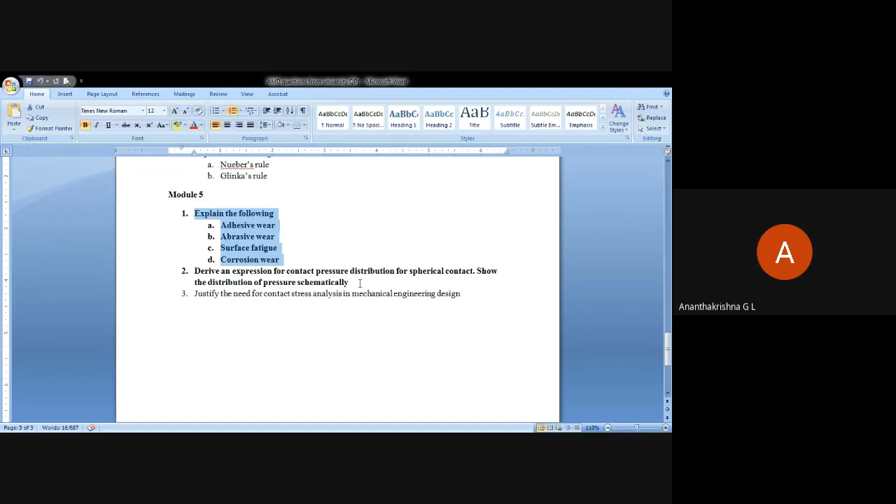Explain the following: adhesive, abrasive wear, corrosion wear, and derive an expression for contact pressure distribution for spherical contact. Show the distribution of pressure schematically. Just note down these two questions.

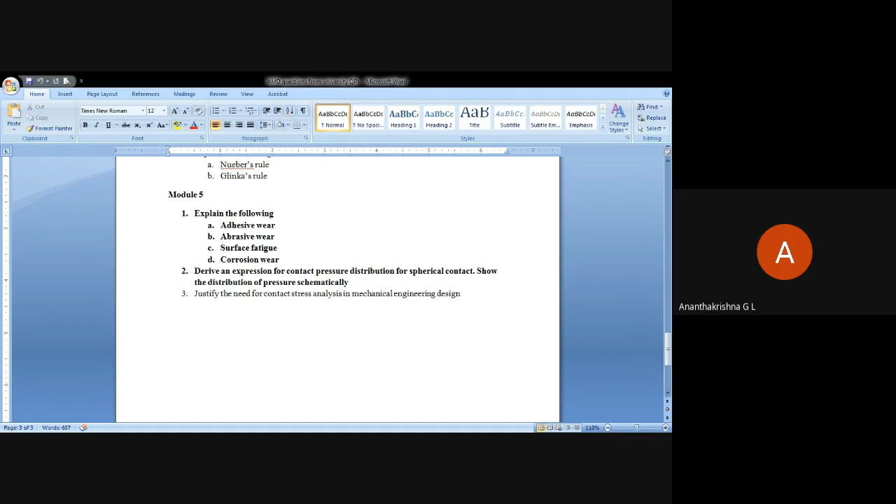Finish noting down? Yes, sir. Yeah. Okay, so

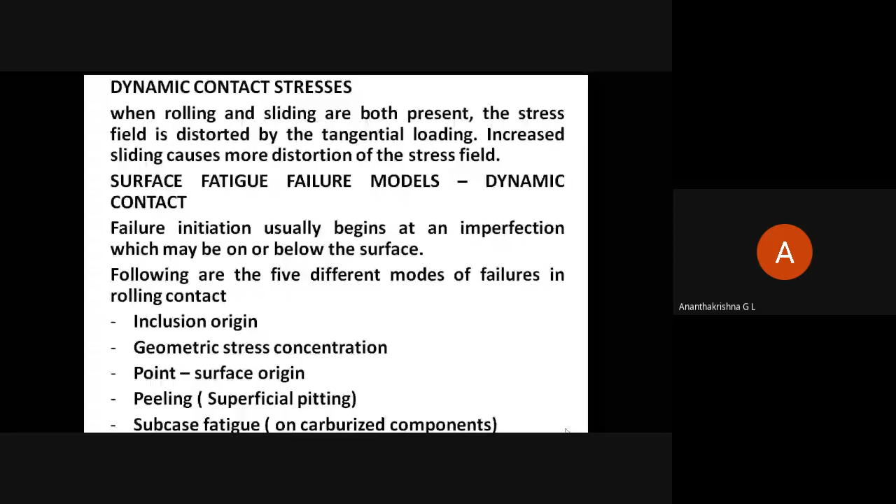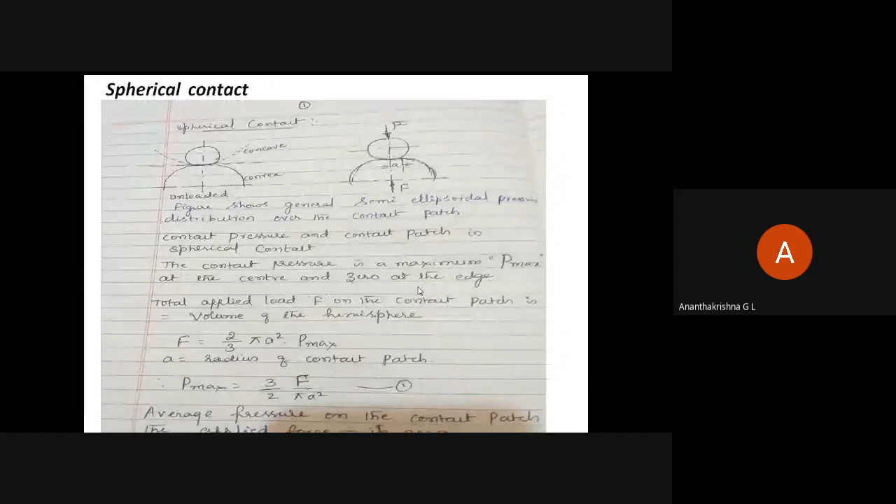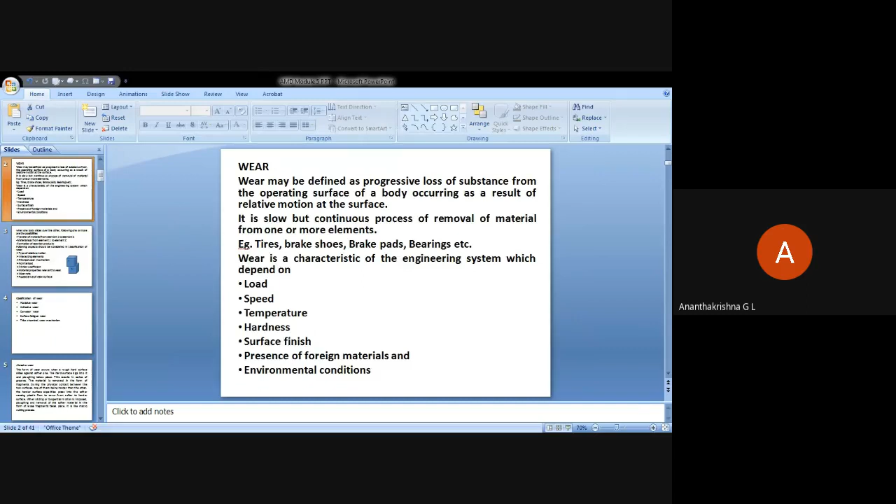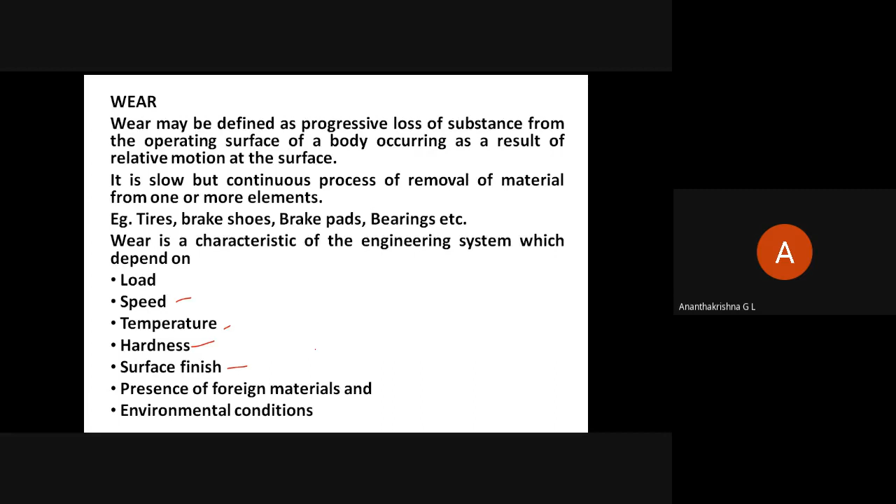Okay, so in module 5, what all we learned, surface failure is the title of the module. In this we learned about wear. It's a progressive loss of substance from the operating surface of a body occurring as a result of relative motion at the surface, and it depends upon load, speed, temperature, hardness, surface finish, presence of foreign materials, and environmental conditions.

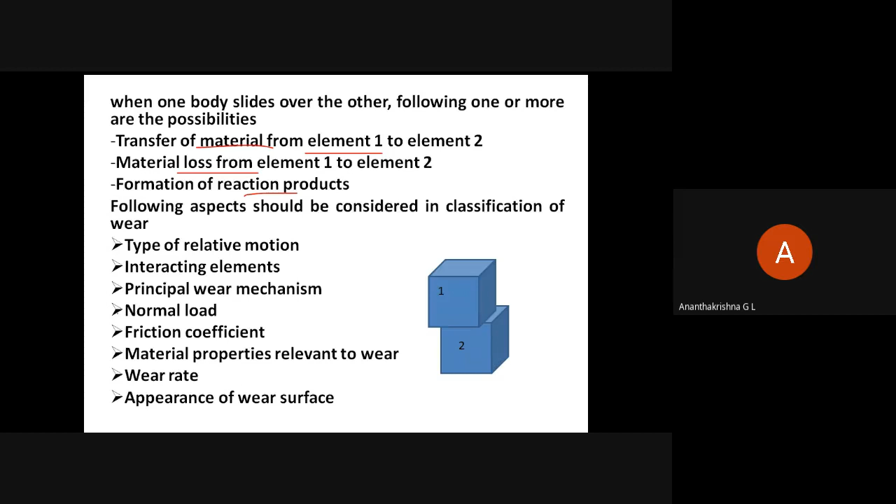And during sliding of one member on the other, the transfer of materials from one element to another is going to take place, from either 1 to 2 or 2 to 1, there's going to be loss of material. And then you will have formation of reaction products. The following aspects are considered in classification of wear: type of relative motion, interacting elements, principal wear mechanism, and so on. In classification of wear, we have abrasive wear, adhesive wear, corrosion wear, surface fatigue wear, and finally tribochemical wear mechanism.

So in abrasive wear, we saw when a rough hard surface slides against a softer one, essentially a grinding machine operation, where the grinding wheel is the hard surface, and the material being removed is the softer one, there you are going to have abrasive wear. In abrasive wear, we have two categories. In category 1, we have 2-body operation and 3-body operation. In category 2, we have gouging, grinding, and erosion abrasion.

2-body operation is like finishing of metal by files, which we have done in our basic workshop laboratories. And 3-body operation is where the particles are reduced in size, as in an ore crushing plant. So that is category 1. Then gouging operation is caused by impact and results in macro deformation of the surface. Example, shovel, hammer in impact pulverizers. So that is gouging operation.

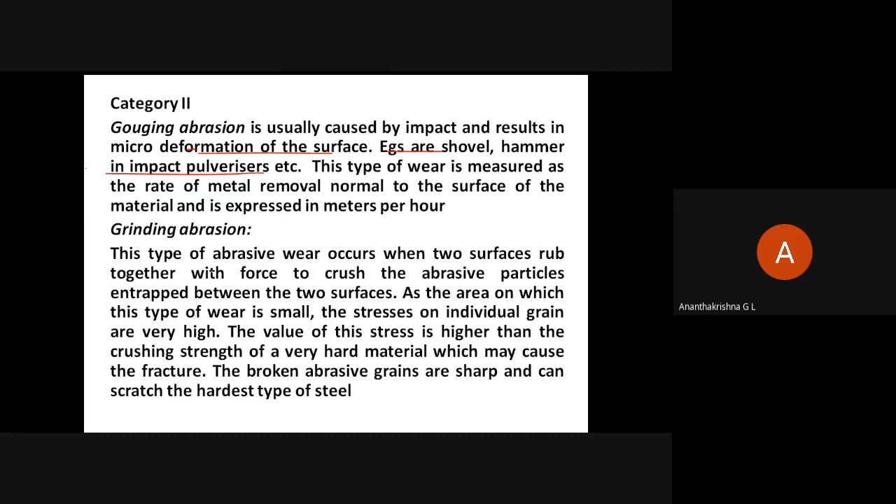Grinding operation is a type of abrasive wear when two surfaces rub together with force to crush the abrasive particle entrapped between the surfaces. So this is grinding operation essentially. And erosion abrasion. So the main cause of erosion wear is impact.

Abrasive particles due to wear may be suspended and carried in fluid such as air or water. This type of wear is found in sand chute. And then abrasive wear depends upon hardness of abrasive and hardness of material.

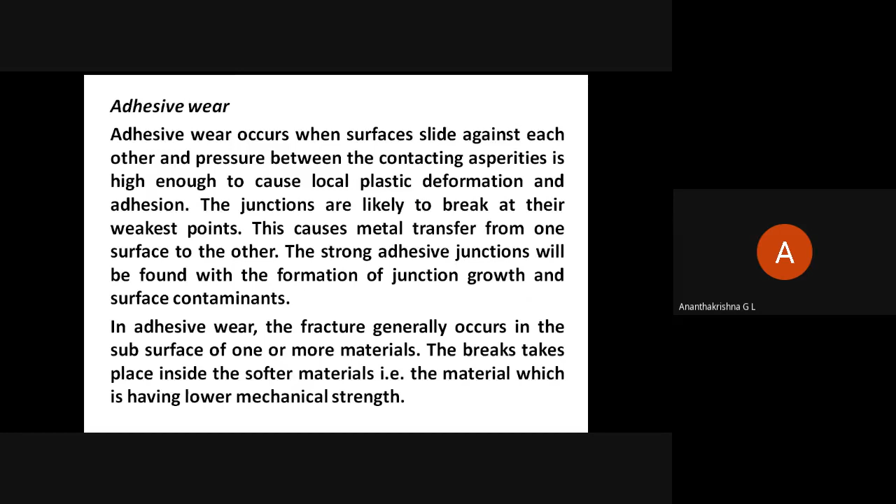Then comes adhesive wear; essentially they get adhered. A welding sort of thing takes place between two surfaces, when one is a softer material and another is a harder material.

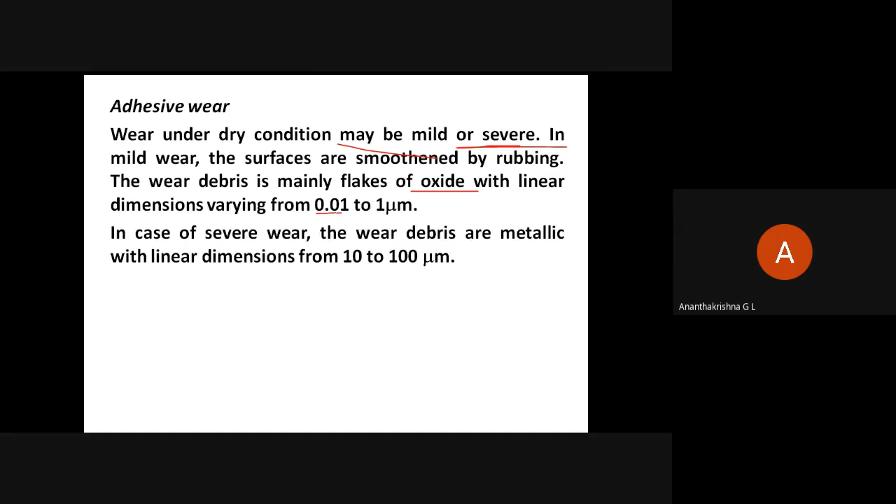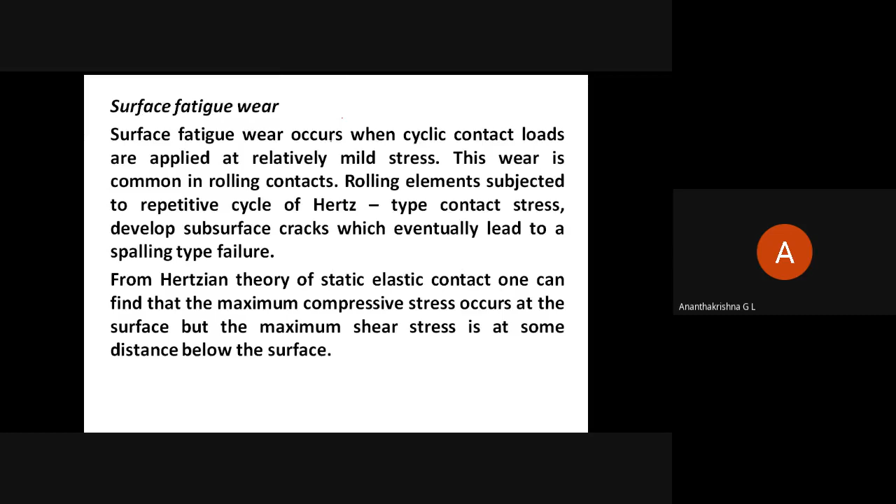Adhesive wear under dry condition may be mild or severe. In mild wear, the wear debris is mainly flakes of oxide, which vary in these dimensions given. And then surface fatigue wear, which is essentially Hertzian type of contact stresses, which normally happens in bearings. So this is about erosion abrasion, abrasive, and so on.

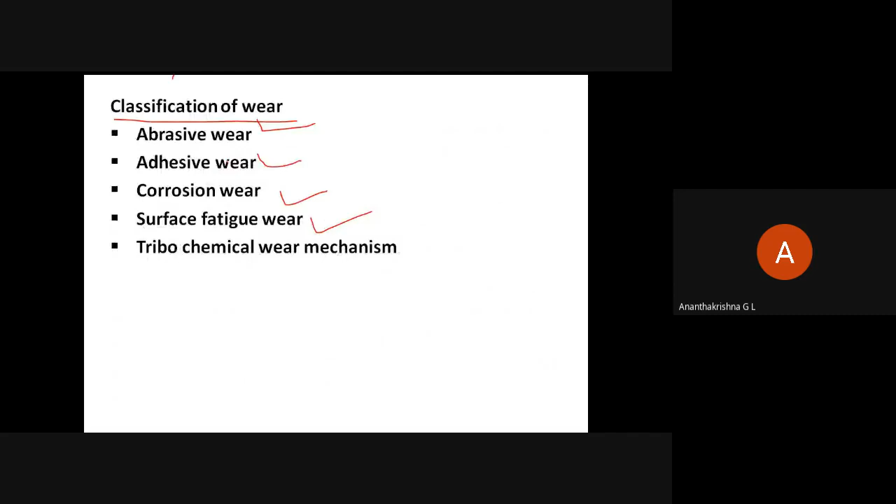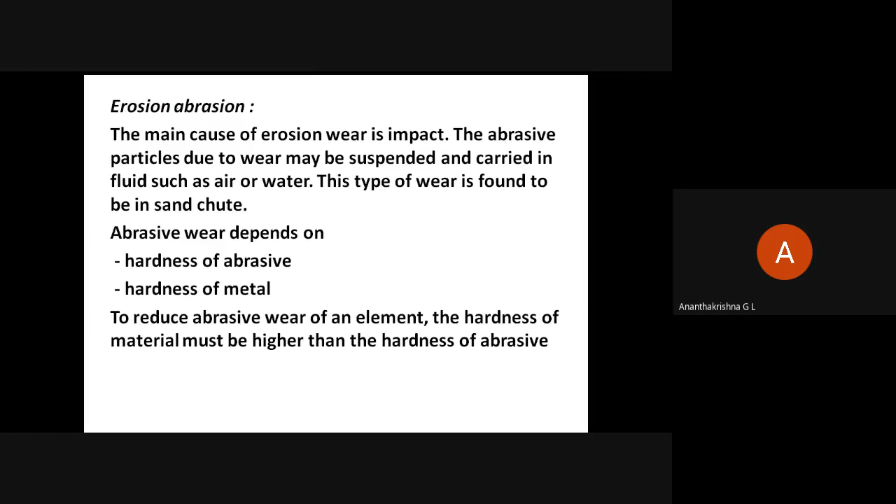So what you need to do is write down abrasive wear, then category 1 and 2. Normally they come for 5 marks each: abrasive wear for 5 marks and then adhesive wear for 5 marks. So you may have to write all this classification and so on. Write this and we'll finish. Maybe this is possible today. In the next class, we'll take the derivation.

Okay, are you there? Yes, sir. Please note it down. Please note down.

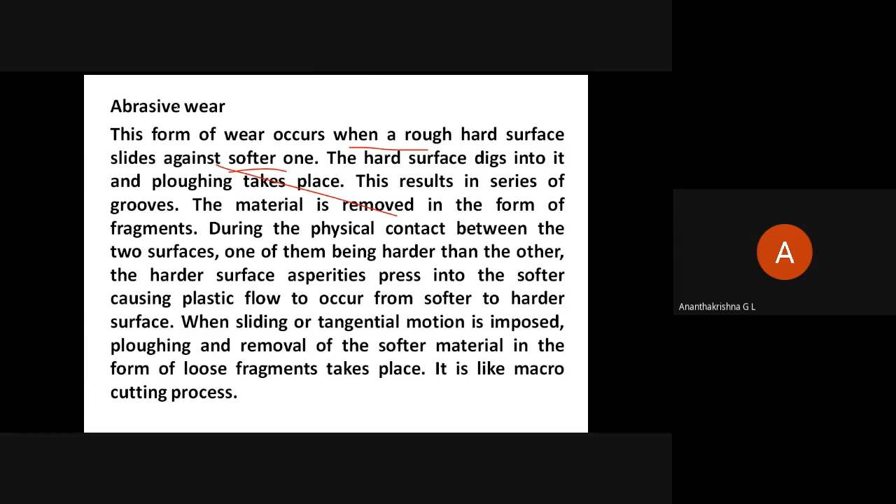Finished writing? Finished this, Sandesh? Yes, sir. Take down category 1, category 2 abrasion, 2 body abrasion, 3 body abrasion, gouging, grinding, and erosion. I think erosion abrasion will come here only, no? For the third one.

It is corrosion, not erosion abrasion. Corrosion wear I don't have in my notes, so you have to extract it from the net or somewhere. Corrosion wear. Okay? Yes, sir. And surface fatigue wear? What about it?

Is it surface fatigue? Please note down this much by the time I check the question papers. It gives it as surface fatigue only. So corrosion wear, surface fatigue. Surface fatigue you have to explain, so you have to explain the fatigue only.

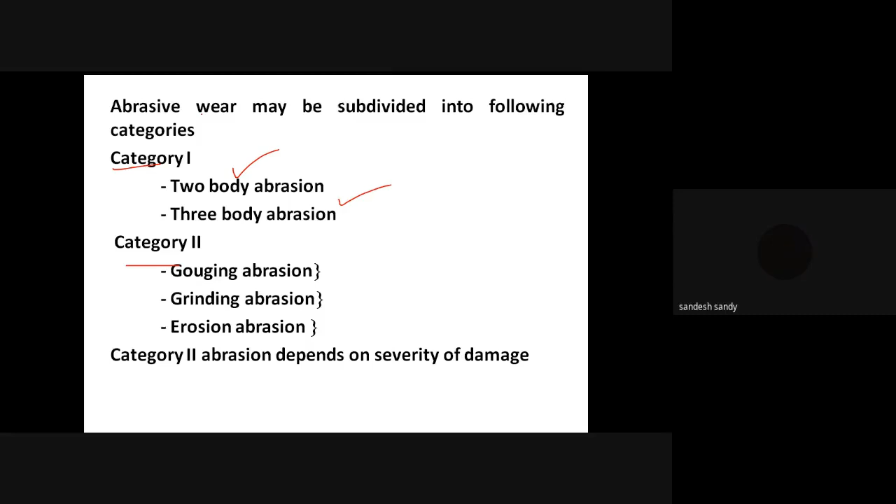Yes. Finished, sir. Finished? Yes, sir. So category 1 is what you write, 2 body abrasion. Check whether it is asked for 8 marks or for 5 marks, and accordingly write, but better you write as much as possible.

And for your third test, it will be module 4 and module 5, and it will be answer any 5 out of 8 questions. Yes, sir. I have told you which are the important questions. The question bank is with you, so you can accordingly write. It will be descriptive type, and 1 hour duration.

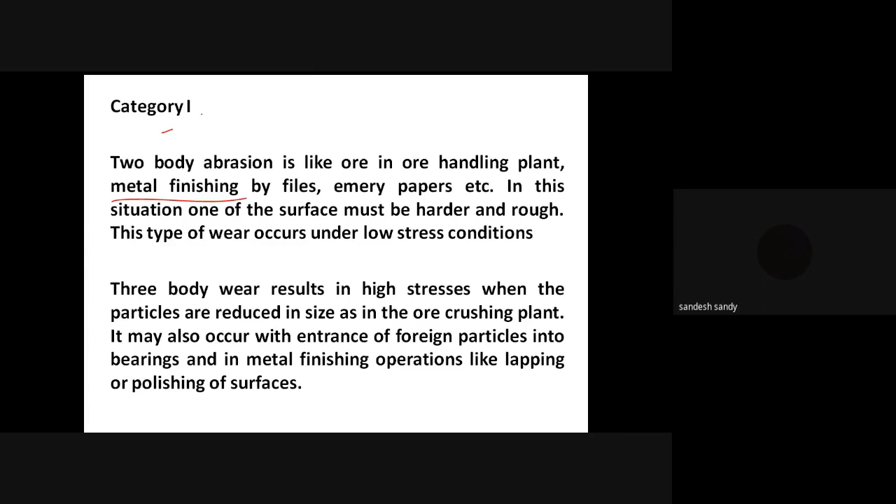If you have finished, I think we can end at 25. Did you finish with this slide? I finished, sir. I completed, sir. Don't know what others. Okay, 1 second. Mohan Ambal, finished writing this? Yes, sir, finished.